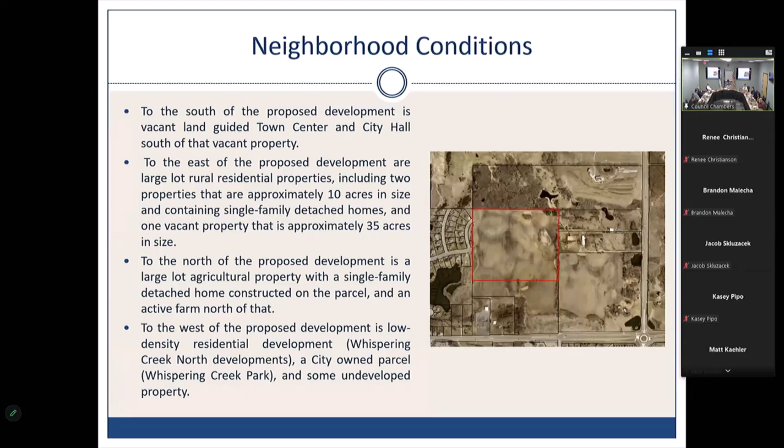Get this on my screen here. Okay, the land is currently guided to low-density residential north of James Parkway and medium-density residential south of James Parkway. The low-density residential zone is home to R1 and R2 zoning within the city, which is 2.5 to 5 units per net acre. Medium density would be R3 zoning, which has a variety of detached and attached residential housing options, at a density of 5 to 10 units per net acre.

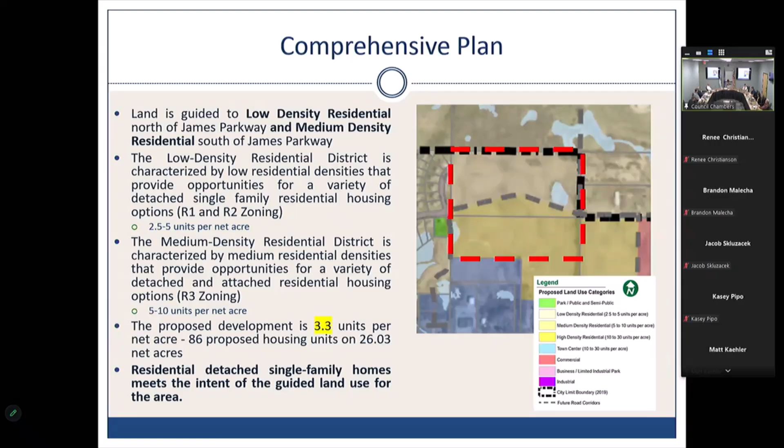The proposed development is 3.3 units per net acre, not meeting the density requirements for medium density, which is why the developer has proposed a comprehensive plan amendment to re-guide the property to low-density residential. Residential detached single-family homes also meet the intent of the guided land use for the comp plan. You can go to the next slide, sorry.

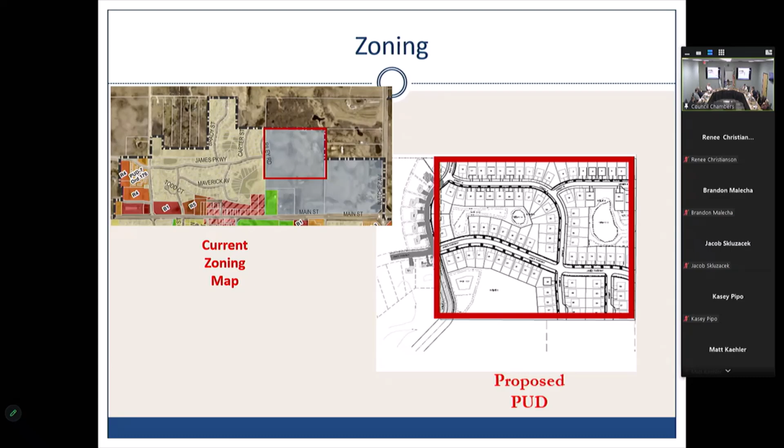Section 11-3-8 of the zoning code identifies criteria to be considered as part of the rezoning. The proposed action has been considered in relation to the specific policies and provisions of, and found consistent with, the city comprehensive plan. The proposed use is or will be compatible with present and future land uses of the area. The proposed use also conforms with all performance standards contained within this title. The proposed use can be accommodated with existing public services and will not overburden the city's service capacity, and traffic generation by the proposed development is within capabilities of the streets serving the property.

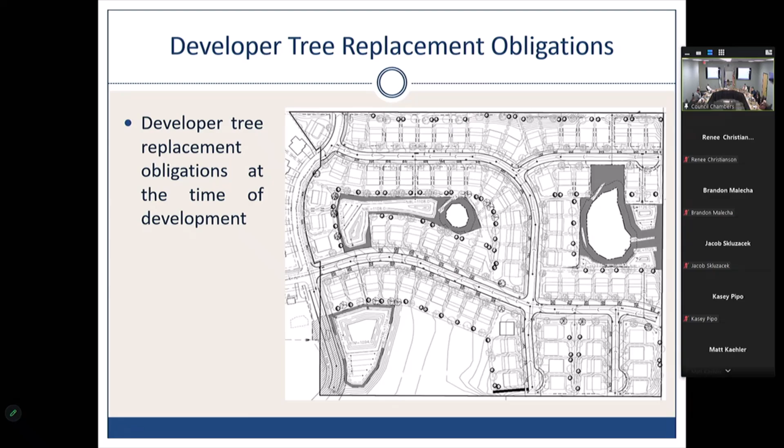The developer's tree replacement obligations are shown here on the plan, with the trees depicted on that map. In addition to the developer's tree replacement obligations, the builder is required to plant 2 trees upon each lot at time of building permit, along with sod. It's cut off a little bit there, but this plan illustrates that 2 tree per lot requirement required of the builder.

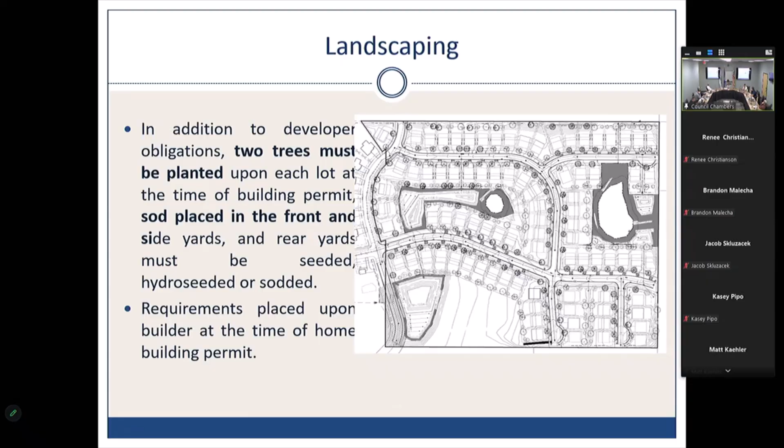Easements have been depicted as required by city code. In addition, 3 temporary cul-de-sacs are proposed within the temporary roadway easements. Staff notes that 2 retaining walls are depicted within these easements on the northeast corner of the plat. The proposed retaining wall should be moved outside of this easement or be removed from the plans entirely.

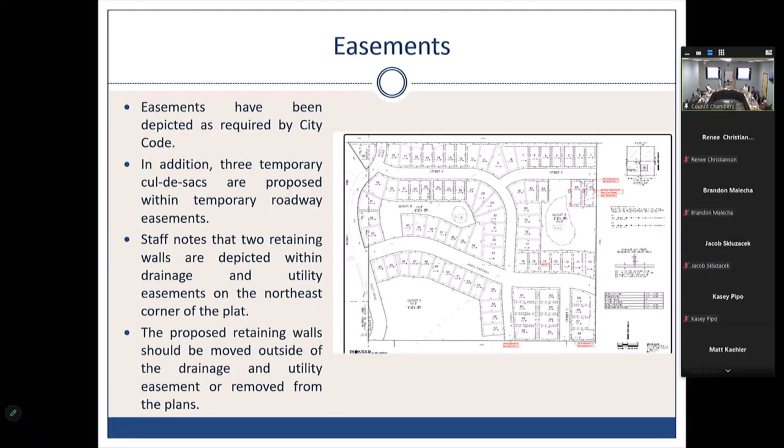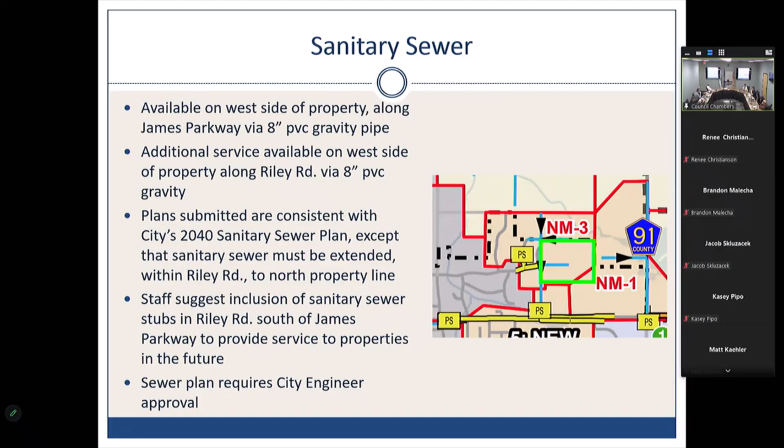Sanitary sewer is available on the west side of the property along James Parkway via 8-inch PVC gravity pipe. Additional service is on the west side along Riley Road via 8-inch PVC gravity. Plans submitted are consistent with the city's 2040 sanitary sewer plan, except that sanitary sewer must be extended within Riley Road to the north of the property line. Staff suggests inclusion of sanitary sewer stubs in Riley Road, south of James Parkway, to provide service to properties in the future. Ultimately, the sewer plan requires city engineer approval.

Water is also available on the west side of the property along James Parkway, via 12-inch ductile iron water main, and at the northerly end of Riley Road. The plans submitted are consistent with the city's 2040 water plan and show 12-inch trunk water main running east to west within James Parkway, and 8-inch water main to serve the remaining development. Staff also suggests stubs in Riley Road, south of James Parkway, to provide service for properties in the future.

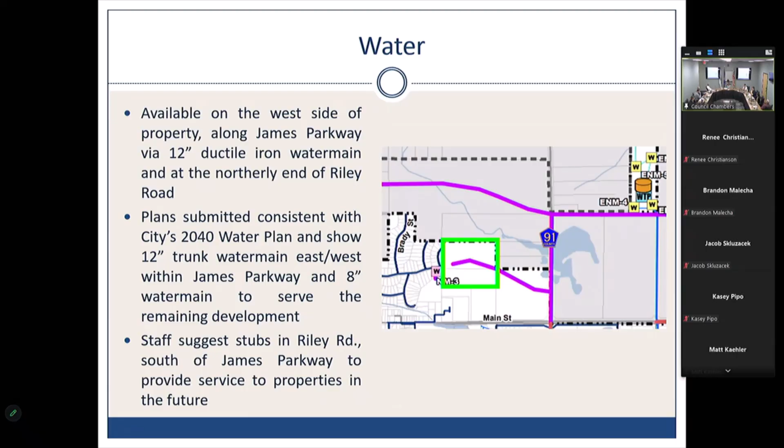A city well is located at the southwest corner of James Parkway and Riley Road in that park. The well is currently considered an emergency well and is not connected to the city's water treatment plant.

The city's engineer has requested the inclusion of an additional 12-inch potable trunk water main running to and through the proposed development. The requested water main is depicted on the plan set and will eventually be used by the city to carry raw water from the existing well to the city's treatment plant. The city will reimburse the developer 100% of the cost for the oversizing of that water line. The water plan will also need to be approved and signed off by the city engineer.

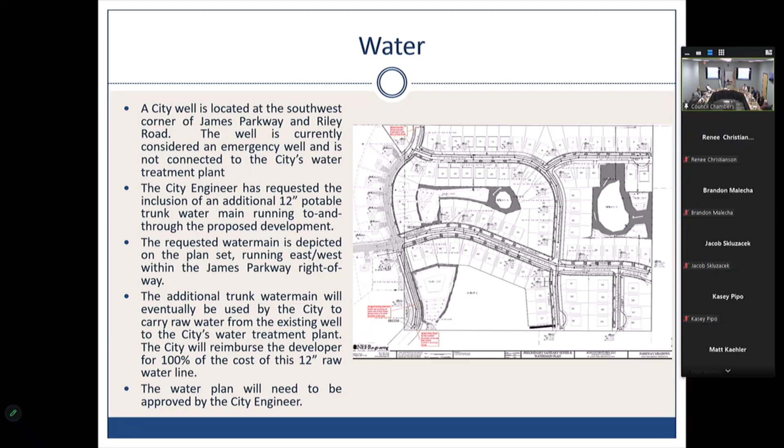The property lies entirely within the Vermillion River Watershed District and is divided into several different sub-watersheds. The stormwater plan must also be approved by the city engineer. The plan shows 4 separate stormwater basins proposed to serve the development, and all basins are located on outlots proposed to be dedicated to the city.

Upon final plat, a 10-foot wide vegetative buffer is also required from the high water line around all stormwater ponds. For Basin 301's pond, as depicted, the buffer must be expanded currently.

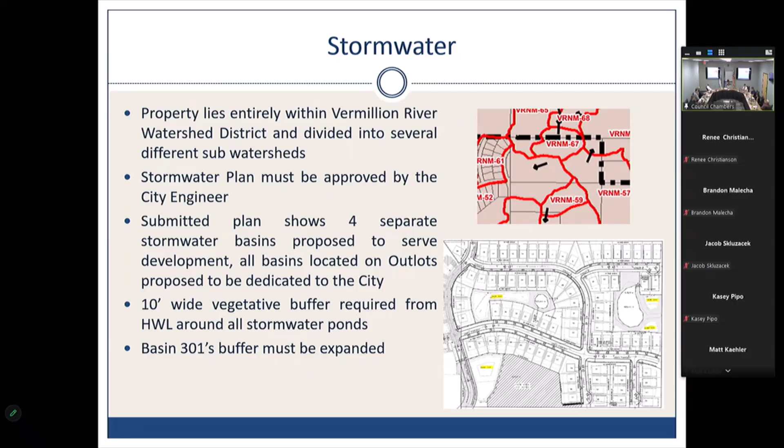Wetland delineation has been completed, in concurrence with the delineated wetland boundaries that were approved by the city in January of 2021. Two wetlands were identified on the property that must be protected in accordance with the Wetland Conservation Act, Clean Water Act, and City Code. Required buffer for these two wetlands within the development averages 25 feet, with a minimum of 16 feet. Buffer sign markers are required along all lot lines at the buffer locations, and there are no FEMA designated floodplains or DNR protected waters or wetlands on the property.

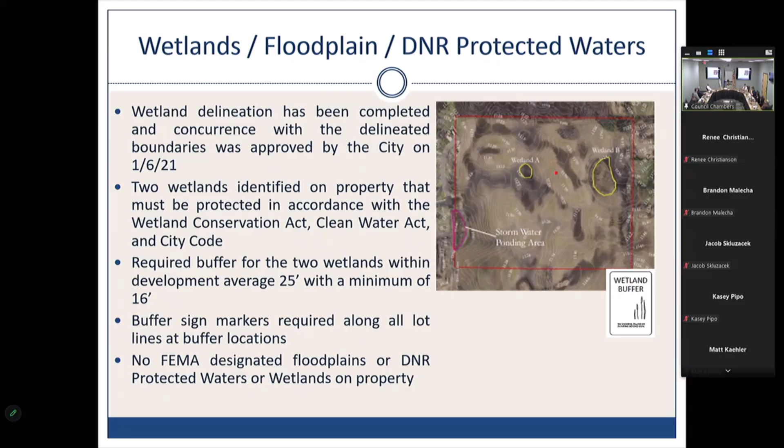This is just the plan depicting those wetlands and the buffer surrounding them.

The proposed development borders on two existing public streets, James Parkway and Riley Road, both located to the west of the subject property. The city's transportation plan depicts a future road running east-west through the subject property, a street extending south which is Riley Road along the west side of the property, and a street running north-south along the east side of the property. All 3 streets are identified as minor collectors in the city's 2040 transportation plan.

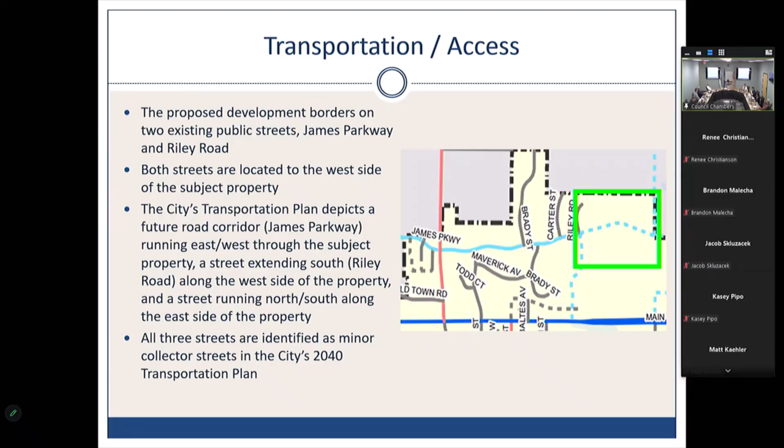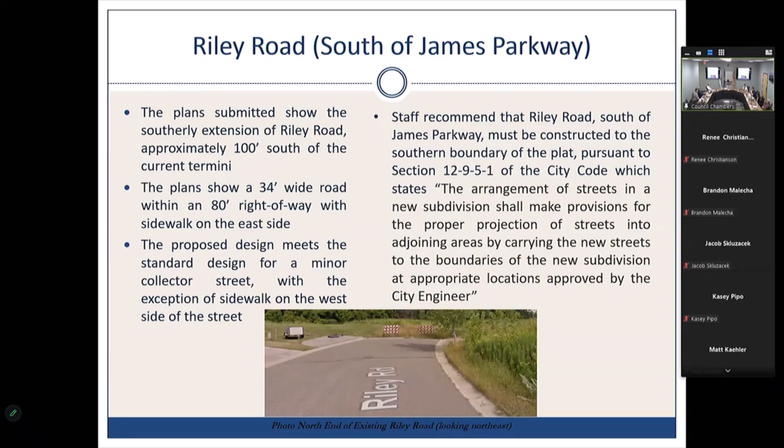Local streets serve as access to properties. They must be a minimum of 28 feet in width with B618 curbing within a 60-foot right-of-way. Sidewalks are required on one side of all local roads. The plans submitted meet minimum design standards for local roads.

Here's a typical section: it's 14-foot lanes instead of 16. Sidewalks are still 5 feet, just one instead of two, and then you have that right-of-way as well.

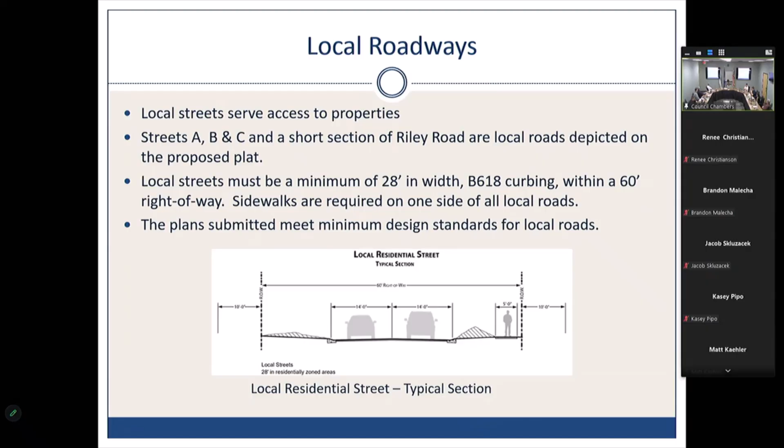A short and northerly extension, approximately 117 feet of Riley Road, is proposed within a 60-foot right-of-way. This section of Riley would be considered a local roadway, and as depicted, the northerly extension meets city code requirements.

Additional high-level comments regarding streets: future road extension signs are required where streets dead end. City code requires temporary cul-de-sacs to be constructed where dead-end streets exceed 150 feet in length. Streets A, B, and C all exceed 150 feet in length, and temporary cul-de-sacs were proposed on the plans. Temporary cul-de-sacs should be oriented so they only impact one lot and be constructed with curb and gutter.

The preferred rotation must be away from the side of the street with the sidewalk, and the cul-de-sac can be reduced in size from the permanent cul-de-sac dimensions, with final configuration subject to the city engineer and public works approval. All boulevards should be sodded by the developer per city code, and concrete driveway aprons shall be constructed from the back of the curb to the property line per city code.

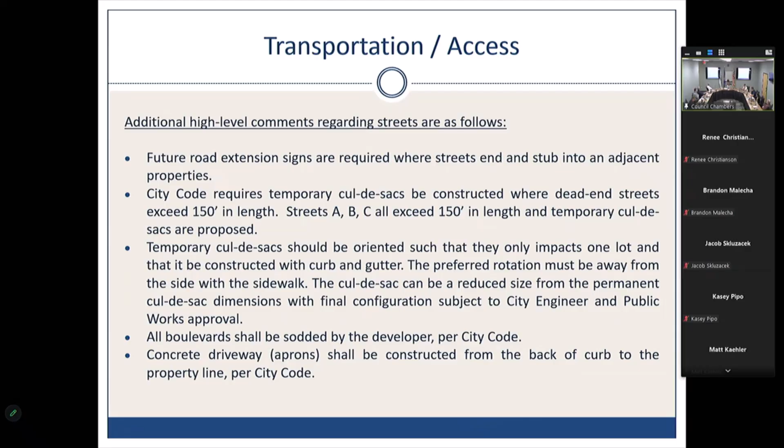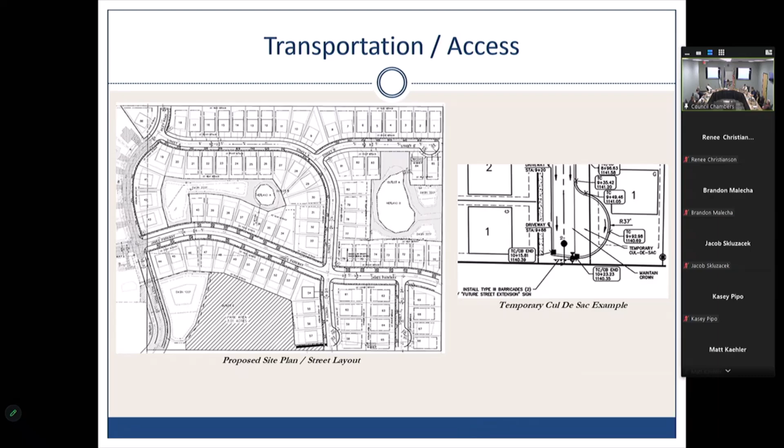We get to traffic. Ingress and egress from the proposed development will be confined to the existing segment of James Parkway until further street connections are provided to the east to either County Road 91 and south to County Road 2. From James Parkway, traffic will likely be distributed to County Road 2 via Todd Street and Dakota Avenue.

Residents of the existing Whispering Creek neighborhood located to the west may have concerns regarding additional traffic on James Parkway. From an engineering perspective, the existing road does have the capacity to handle the additional traffic, and it is noted that any such increase in traffic will be temporary until future road connections are made via other routes.

Concerns may also be expressed regarding impacts to the Todd Street and County Road 2 intersection, or the Dakota Avenue and County Road 2 intersection. Staff has no knowledge of major operational issues at these existing intersections which are causing unacceptable levels of service. I'm not a traffic engineer, but Rich, did you want to go in more depth on levels of service? That says it. Okay, specific questions we'll take up.

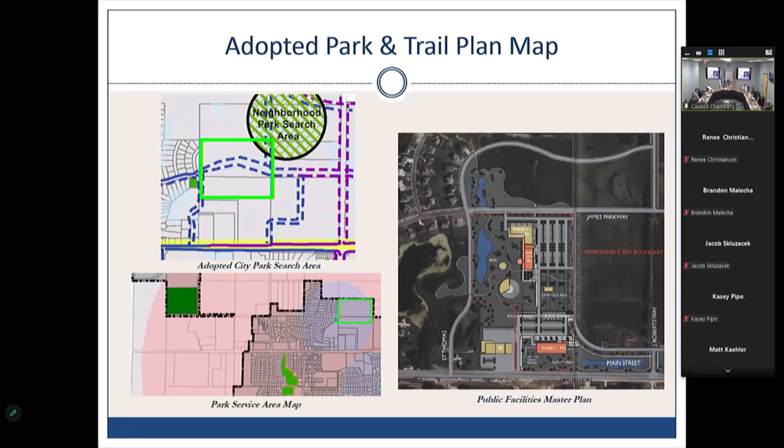This plan on the right-hand side was approved in 2008 by the city, and it's the Public Facilities Master Plan. It's a very high-level plan that contains part of this property in the north of City Hall section of this drawing here. We'll get into park or public land dedication shortly, but this will help explain what the city is asking from the developer for. We can come back to this.

Maximum length of all blocks shall be 1,200 feet. Minimum length shall be 600 feet. Blocks that are over 900 feet in length require pedestrian ways at least 20 feet wide. The use of additional pedestrian ways to schools, parks, or other destinations may be required.

The northerly block exceeds this requirement stated before. The minimum lot area shall consist of buildable land exclusive of wetlands, utility transmission easements, and pipeline easements that encumber lot development. The developer is requesting that the northerly-most block be allowed to exceed that limit in length due to the landforms to the north, steep slopes and wetlands, which prevent that road connection.

The city requires 8% of the land be dedicated for parks, playgrounds, or public open spaces. The developer shall make a cash contribution to the city's Park and Trail Fund, roughly related to the anticipated effect of the plat on the park and trail system. So the city can request either 8% of that land be dedicated as land for parks, or 8% of the cash value for the land be dedicated in the Parks Fund for future parks.

The plat contains 33.09 net acres. Land dedication required for the plat would be 2.65 acres. If no land dedication was required, the park fee of 8% of the fair market land value would take effect. Whispering Creek Park already serves the area, as we already mentioned, as well as Wagner Park.

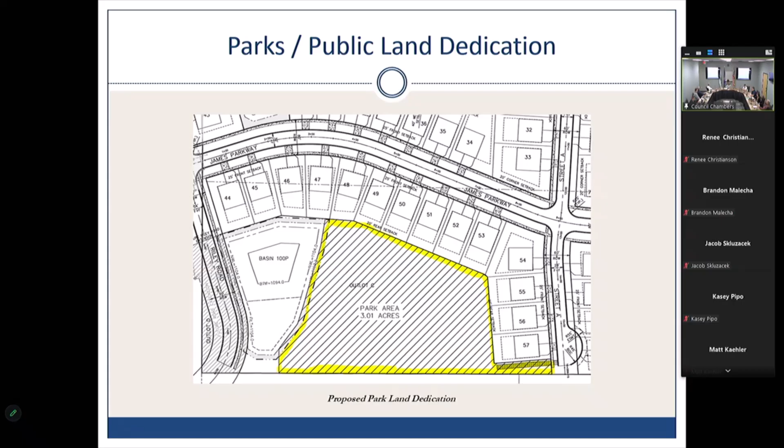So it could be the location where the new fire hall is going to go. It could be the location where the new police department, library, city hall, park, playground go. It's up in the air at this point, but the city is just trying to secure that area for that future plan.

Additional comments: the city engineer reviewed the memo on April 15th. Public Works supports the temporary cul-de-sac and inclusion of the raw water line to the eastern edge of the plat. Public Works also mentioned they'll need access to all ponding areas for maintenance purposes. The police chief has reviewed the plans and saw no public safety concern in regards to neighborhood layout.

Fire department had no concerns. Building official had no comment. City attorney had no comment. School district impact: an average of 0.55 students per household times the 86 houses equals about 47 students, which can be anticipated to be added to the New Prague School District. That study has not been updated recently, so those numbers aren't 100% accurate.

The proposed plat contains a remnant strip on the west side of Riley Road, proposed as Outlot D. Subdivision ordinance prohibits the creation of such strips, which may control access to streets from adjacent properties, except under conditions approved by City Council. Staff notes that the adjacent property owner to the west, Winkler Land Company, LLC, is also a party to the current application. Staff recommends that proposed Outlot D shall either be conveyed to the adjacent property owner, Winkler Land Company, or dedicated to the city as part of the Riley Road right-of-way.

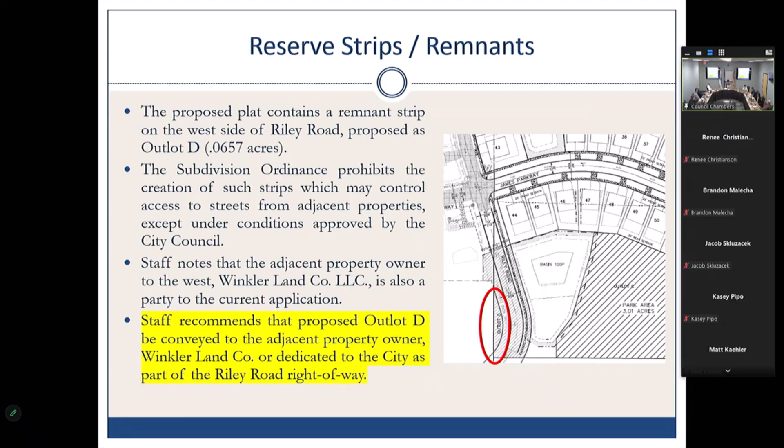So we'll finally get into the staff's recommendations for the action items here tonight. Staff does recommend approval of the request to amend the city's 2040 comprehensive plan to re-guide approximately 17 acres from medium-density residential to low-density residential, because the proposed re-guidance will not have a serious or negative effect on the overall planned land uses within the 2040 growth area and will help achieve housing goals contained within the comp plan.

On the rezoning, staff recommends approval of the request to rezone 33.31 acres from urban reserve to planned unit development, and the request to rezone 0.68 acres from R1 suburban single-family residential to PUD planned unit development, because it's consistent with the city's comp plan, which guides the property to low-density residential. The proposed use of the property for single-family residential is compatible with present and future uses of the area. It complies with performance standards contained in the city's zoning and subdivision ordinance, except as specifically identified in the PUD ordinance for the Parkway Meadows development.

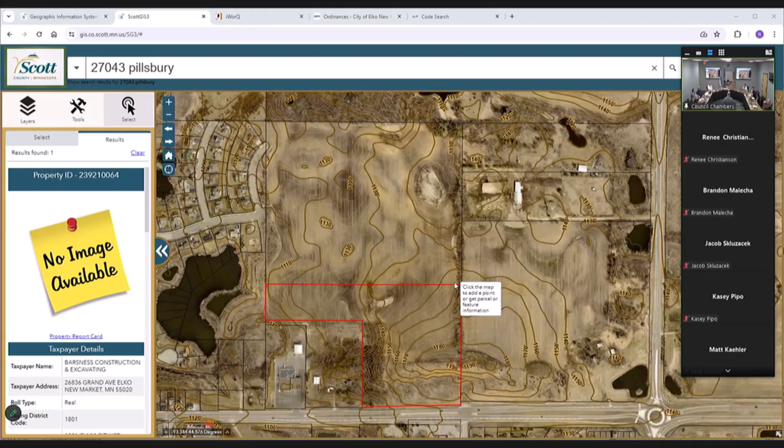It's hard to believe it was nearly 2 years ago that we were here in front of you presenting the concept plan, which at that time was extremely well received, which we appreciate. The reason we have the PUD process is we're trying to bridge two different underlying residential zonings. We've got the low-density housing, which allows for 85-foot lots, and the R3 or medium-density housing that allows for 60-foot lots, and we've tried to balance that with predominantly 65-foot lots.

What we're trying to attract, our goal is to attract families and new residents to Elko New Market, and hopefully this is their first purchase in Elko New Market to establish themselves and their families as residents. Maybe not their last purchase, but hopefully their first. With the layout we presented and the lot dimensions, I think we can create a community there that is achievable and appealing to that audience, and I think that's important.

I'm here with my associate, Rick Jansen, and also Nick Polta of Pioneer Engineering, so we're certainly available to try to address any questions or issues that you have. I know there are a couple of things we need to address, and to Dale's point, that is something we considered and would consider again, but circumstances didn't allow us to do that right now. Anyway, if there's questions, we're happy to address them. Thank you.

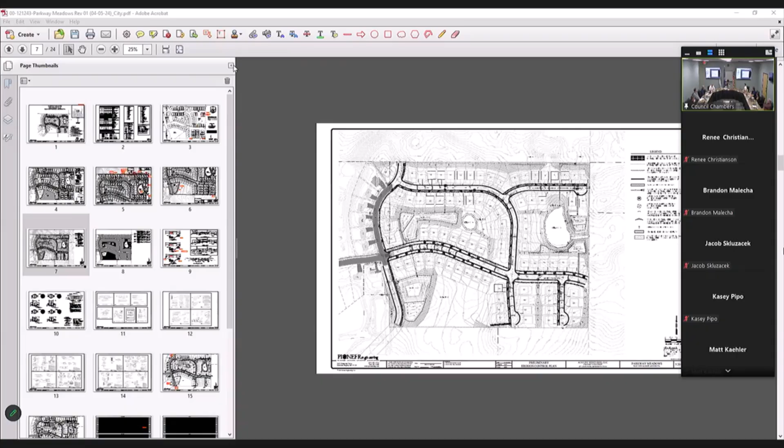So you can see this block, where my mouse is. I'm going to blow it up a little bit. Street A, yeah, so along the northerly property line, which I believe abuts most of Tim's property.

Riley Road will be extended to provide a connection to your property. We did look, or the city engineer evaluated with the developer's engineer, the property to the north, which had quite a bit of topography and didn't see a really good spot for street connection, if you would want to develop in the future. So we kind of just stuck with the Riley Road connection.

That would provide sanitary sewer to your property, should you choose to develop at some point. And that one will be difficult, so. Yeah, I know, there's no good connections on that side that's not a steep drop off or a wetland. Basically everything there, yeah, even the backyards of the lots in this block will have very steep backyards.

Okay, that answered what I had, so.

Just looking at how the street C's and street A, with regards to the Barsness's concerns, I mean, I do think we'd be doing an incredible disservice if we don't allow them to develop that, because that is a major roadway that can get back there. And to, I think, Kasey, can you speak a little louder?

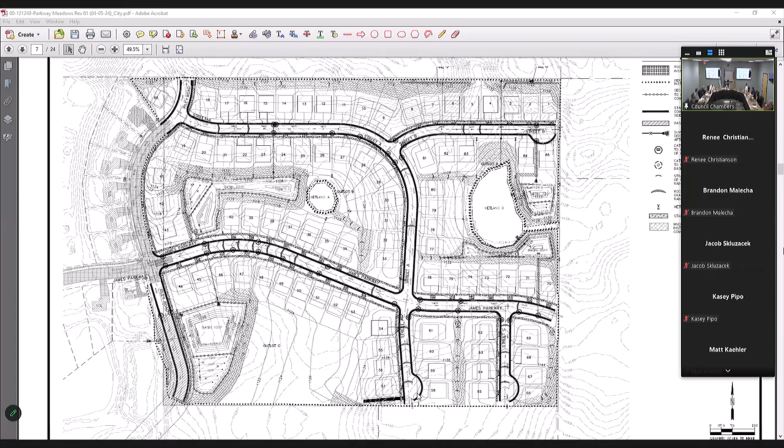Yeah, I agree with that. Joe, Kasey, thoughts on that? Okay. Right. Because I was gonna say, when you go to the Barsness property, that makes that next lot kind of impossible to fit, with the city owning, well, the city wanting the area to the north, so. With the road there, it'd be a weird looking lot.

Am I allowed to approach it? Go ahead, it's your application, sure.

So I can appreciate the horse trading that goes on with the PUD. Again, if I back up a little bit, there was a time when the city was considering this size of a lot as an R zoning. The city has not made progress in that regard in the 2.5, closely 3 years that I've owned the property. And so rather than waiting, we decided the best approach was the PUD. It was a balance between the low-density R1 and the medium-density R3.

We are trying to hit an achievable threshold for entry-level buyers. Each lot you take out of this makes the remaining lots more expensive, because the same infrastructure is required. So yes, it's a PUD, and yes, there's give and take, but reducing development by 3 lots puts the burden on the rest of the lots, and it all adds up. Anyway, thank you.

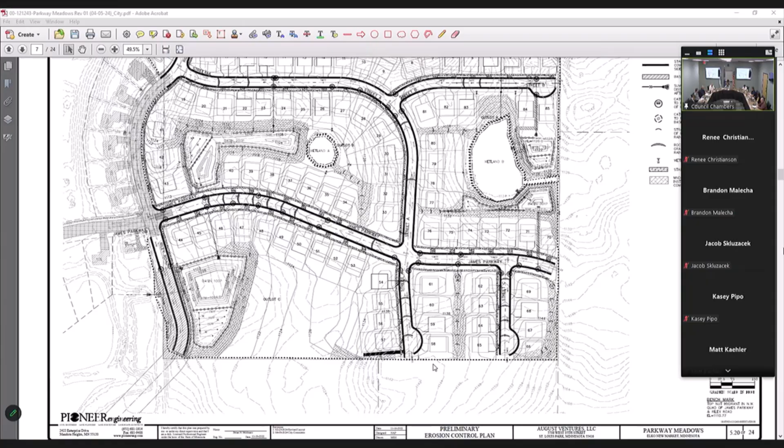Next up, we have another public hearing for R&F Properties. Is there a presentation? There is. Thank you, and I will be handling this presentation.

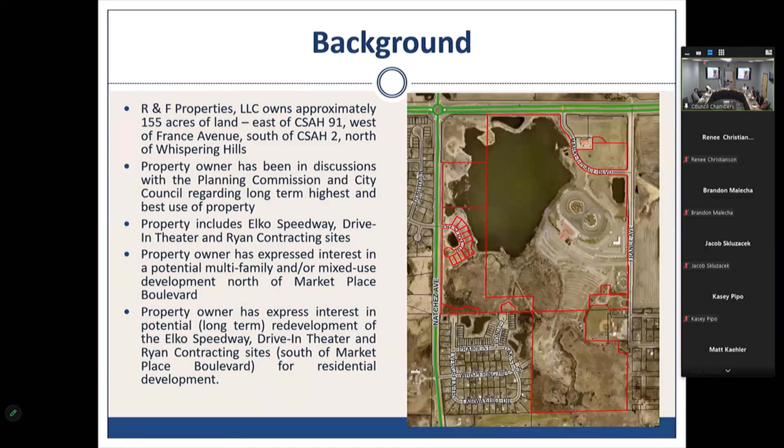The property owner representative, Tom Ryan, is with us tonight, and he has been in discussions with the city's planning commission and city council regarding the long-term highest and best use of his property. This property includes the Elko Speedway, the drive-in movie theater, and the Ryan Contracting sites. The property owner has expressed interest in a potential multifamily and/or mixed-use development on his property located north of Marketplace Boulevard, and in potential long-term redevelopment of the Elko Speedway, drive-in theater, and Ryan Contracting sites south of Marketplace Boulevard for residential development.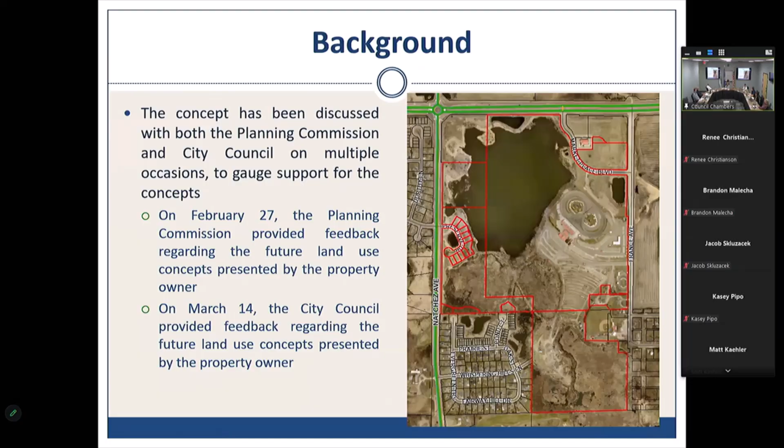The concept plan has been discussed by both the Planning Commission and the City Council on multiple occasions. Most recently, on February 27th, the Planning Commission provided feedback regarding future land use concepts for the property. And on March 14th, the City Council provided their feedback regarding future land use concepts presented by the property owner, and provided a pretty direct recommendation regarding what they would support.

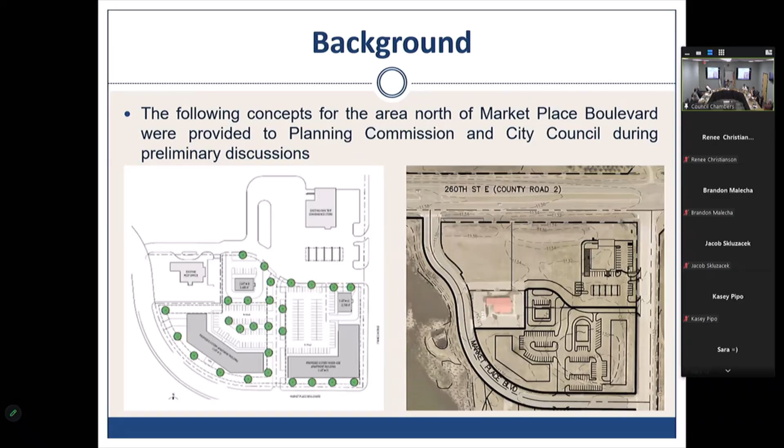Again, you can see the multifamily building on the southwest portion of the site. On the southeast portion of the site, it could be an entirely commercial building, or a commercial building with residential above, and then maintaining a little property on the north for some single-use buildings, such as a standalone subway or similar building.

Based on this final recommendation from the City Council, staff have prepared full revisions to Chapter 6, the land use chapter of the comprehensive plan, by adding a new mixed-use zoning classification. This classification allows an option for residential above the main floor on commercial buildings, and for projects containing a residential component, a density of 8 to 30 units per net acre.

This comprehensive plan amendment also amends the land use map to re-guide Mr. Ryan's property accordingly.

State statute requires that upon changes to our comprehensive plan, we provide notice to adjacent and affected jurisdictions. We've identified the Lakeville School District, New Market Township, Scott County Planning, Highway, and Parks Department, the Vermillion Watershed District, and the DNR as adjacent and affected jurisdictions.

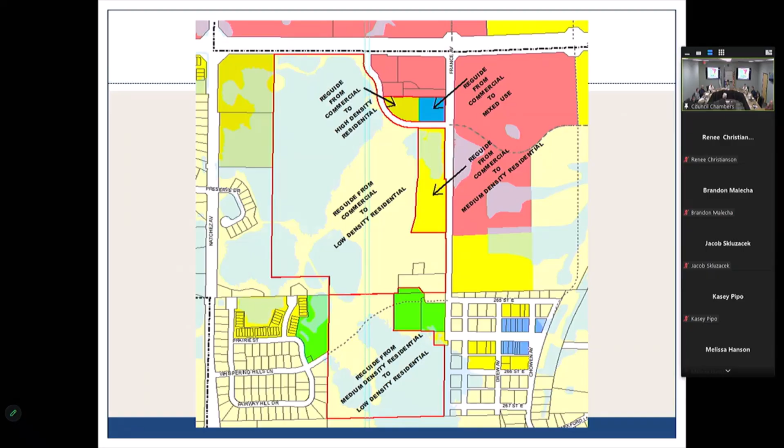I want to start off by saying there's two real issues here. It's rezoning the Speedway property from commercial to residential use. Now, before we go any further, the Speedway as it exists now, and has existed for more than 60 years, is viable. I intend to operate it that way until it becomes not viable. I don't see it being unviable or not a good business for coming years. I just don't see it. But as everybody has probably been to the property or seen it, if there wasn't a Speedway there, it just isn't suitable for commercial use.

Well, it could be suitable for commercial use, but the land is rolling, it's got wetland features, it's got mature trees. It just seems like, given its place in the city as far as the wetlands and lakes around it, it's more suited for residential use than commercial. So that's one purpose here — to get the right zoning on the property. But again, the Speedway, I always intend to run it as a Speedway.

There's a history there, so on and so forth. I think it's good not just for the community, but also for the region. So as long as the racing business is viable, we'll continue to run it that way. After the Speedway's gone, I think what we're proposing to the city is the best use for the property is some kind of residential.

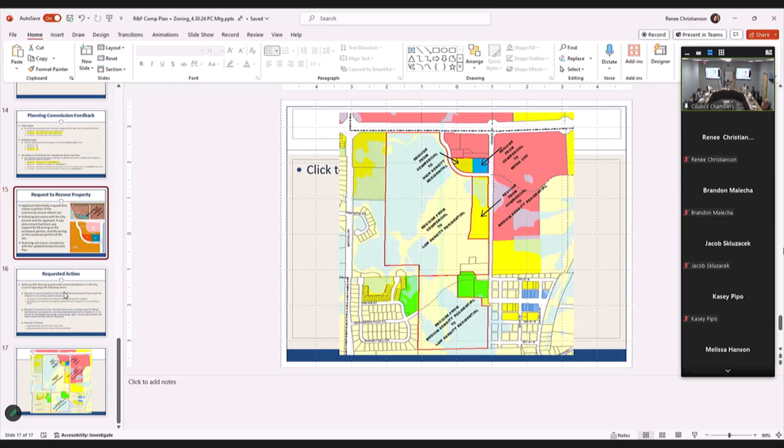I'll go ahead and make the motion then for those three items as well, as recommended by staff. I'll second it. All in favor? Aye. All opposed? Right, it passes.

Next, moving forward, we have our third public hearing, to consider amendment to Chapter 9 of the subdivision ordinance regarding utilities and driveway aprons. Brandon is going to handle this request.

It's a pretty easy amendment, so we don't have any PowerPoint, but what you see on the memorandum is what's described. Things that are struck through will be removed, and things that are underlined will be added. All of this was looked over by the city engineer and approved.

I'll take any questions, but that's really all. Was the development we looked at tonight, August Ventures, based off of this ordinance and now we're looking at doing something different, or? No, really we're just cleaning up some language. For example, we had language that said it shall be ductile iron pipe for water mains, but in practice we don't do that. So we're just cleaning up the language to more accurately reflect what we actually do. But it is not dependent on or will affect the previous development proposed tonight.

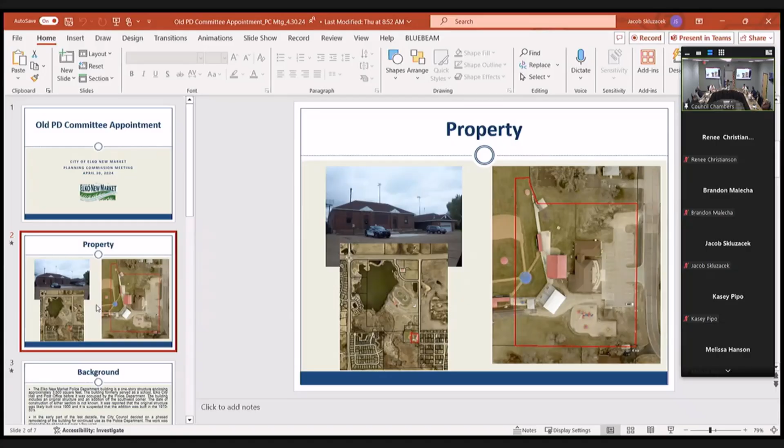So here's the property, old PD, formerly the police station, City Hall in Elko. It's right next to the Elko Express Ballpark. For those of you who aren't familiar, currently it's being used by the food shelf, and part of the property is also being used by the Elko Express. It's a one-story structure, approximately 3,500 feet. It was actually a school building and a post office long ago.

The original structure is likely built around 1900, but it's suspected the addition was built in the 1970s or 80s. In the early part of the last decade, City Council had a phased remodeling plan for the building, planned to be phased out over a few years. Right now we are all the way into phase 4, interior improvements to meet city code, OSHA, and ADA standards, so a fair amount of work has been done. All phases were intended to be completed within a few years.

However, in 2019, it was determined that it was a better alternative to relocate the police department to City Hall, so this was put on hold for a while. The city council has not made a final decision regarding the future use of the structure, but they do want to repurpose the building into some form of community space. So at the April 3rd, 2024 city council meeting, the council discussed the topic and directed staff to initiate a search committee to handle discussions related to the property.

That search committee would be made up of 1 to 2 city council members, 1 planning commission representative, which is why we're here tonight, and 1 parks commission representative. We're also going to bring in Hope for the Community Food Shelf, a member from the Elko Express, 1 to 2 representatives from local organizations like the Boy Scouts or the Lions who may be likely to use the space, and then 1 to 3 additional at-large citizens. Staff will facilitate the meetings and provide technical input as well.